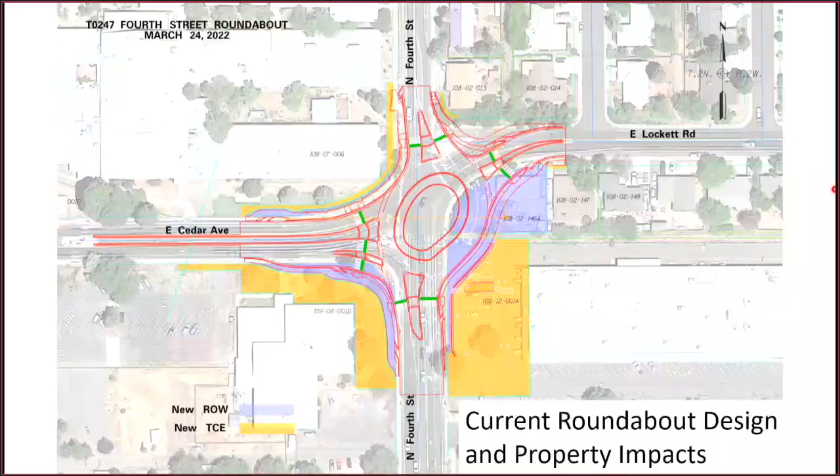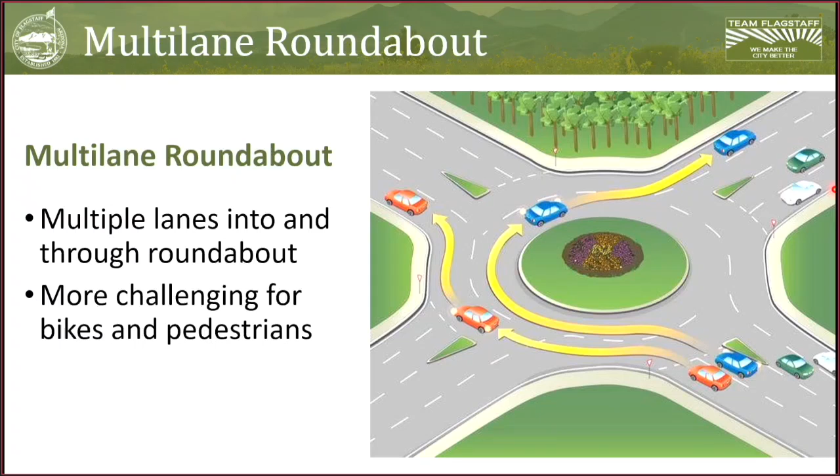I'm going to talk about several different terms that have been out there that people have been talking about. Multi-lane roundabouts are multiple lanes into and through the roundabout. This is a much more challenging situation for bikes and pedestrians, since there are multiple lane crossings that people have to cross. This is really only preferred in situations where we're on an arterial with high traffic volumes.

Turbo roundabouts are another term you may have heard. This is an alternative to a multi-lane roundabout that incorporates spiraling lanes. You have to select the lane you want to use before entering the roundabout, based on where you want to exit. Once inside, curbs or other features discourage lane changes, so you just follow your path until you reach your exit. This restricts lane changing while in the roundabout and is primarily done to increase efficiency for vehicles.

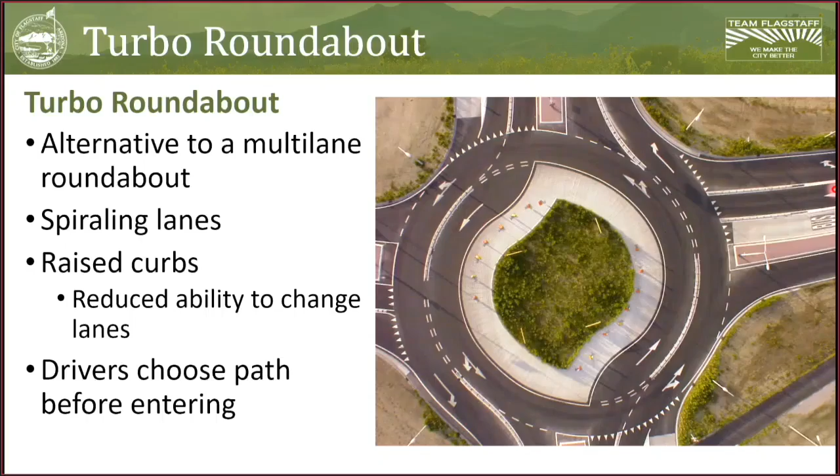The Dutch Bicycle Priority Roundabout, or Dutch Roundabout. The red circle around the outside is a separated circular bikeway. The primary consideration is that bikes and pedestrians have the right of way, so vehicles must yield to any bikes and pedestrians within that bikeway. These have been installed throughout Europe in multiple locations, and some data suggests there's actually an increase in crashes related to this design compared to a more conventional roundabout.

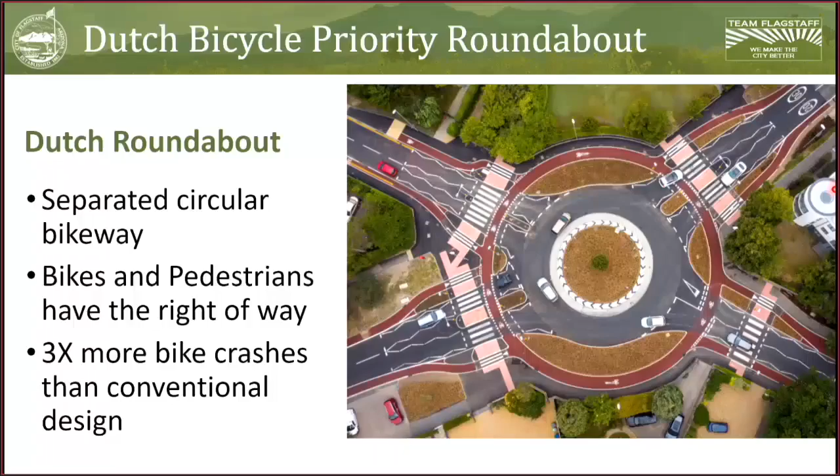Traffic circles aren't roundabouts, they're larger. This one is located in New York City, one of the most famous traffic circles of all time. These can have actual stop signs or traffic signals within the circle, and they're relatively large with relatively high speeds.

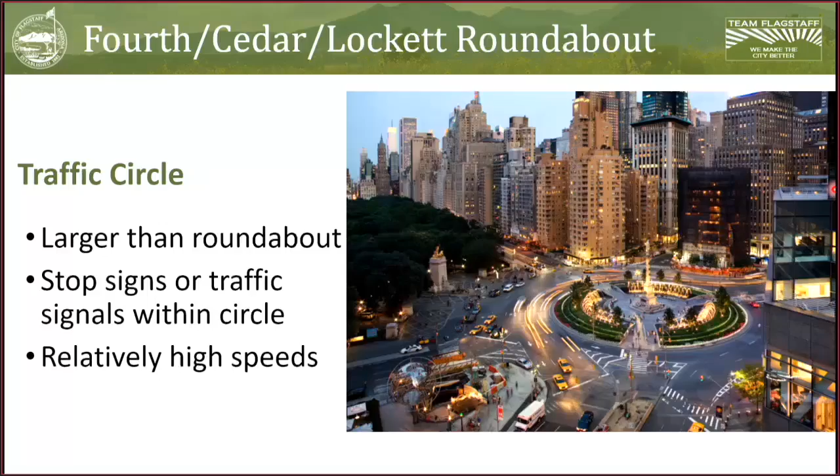Protected intersections - a word we've all heard recently. This is a signalized intersection that offers separated and protected facilities for bikes and pedestrians, allowing priority crossings so they can start or complete movements before vehicles move forward. It's an improvement on the traditional signalized intersection, but unfortunately it doesn't offer meaningful safety improvements for car versus car crashes - it's still a cross intersection subject to T-bone or 90-degree crashes.

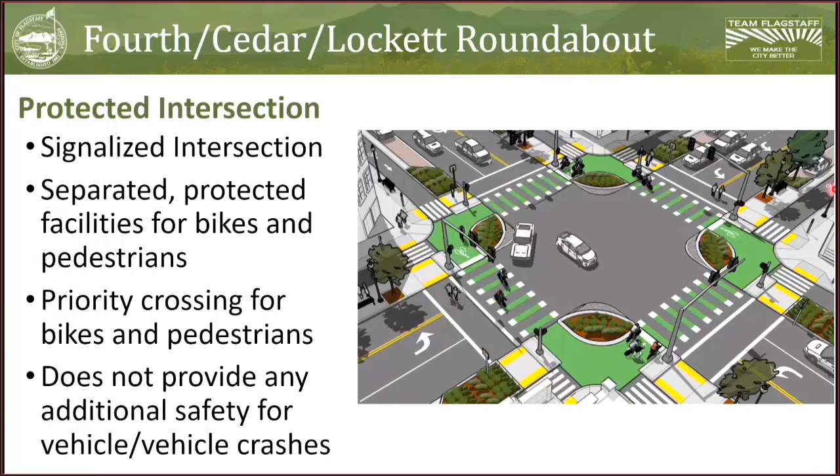Now we have a short video about protected intersections, from San Luis Obispo.

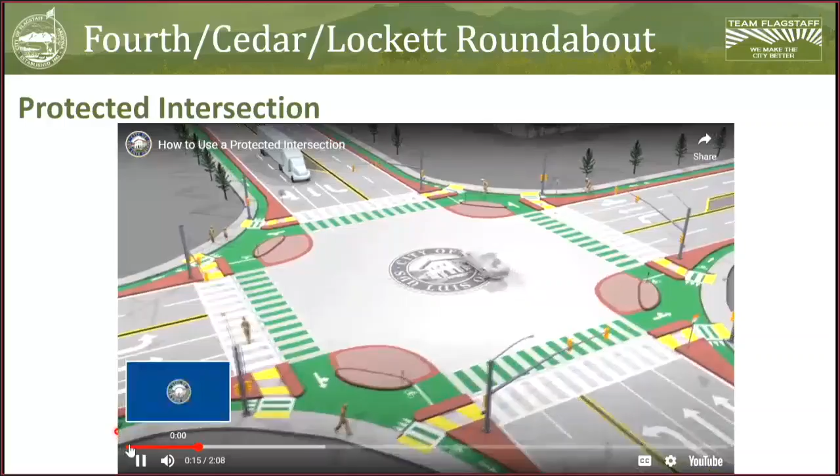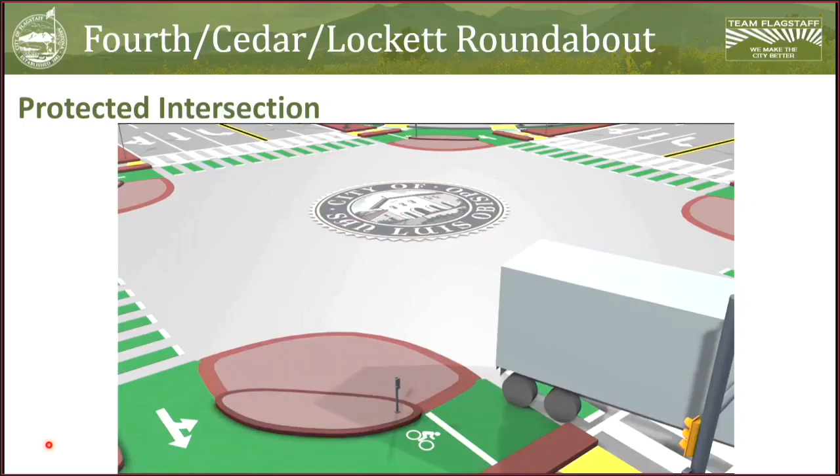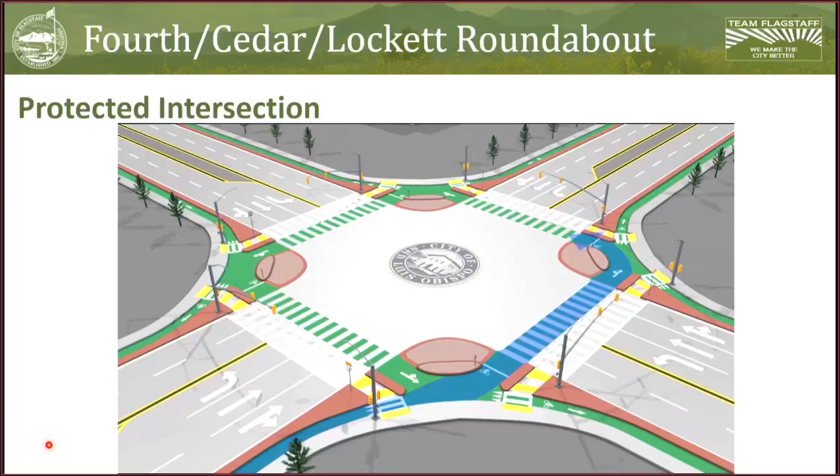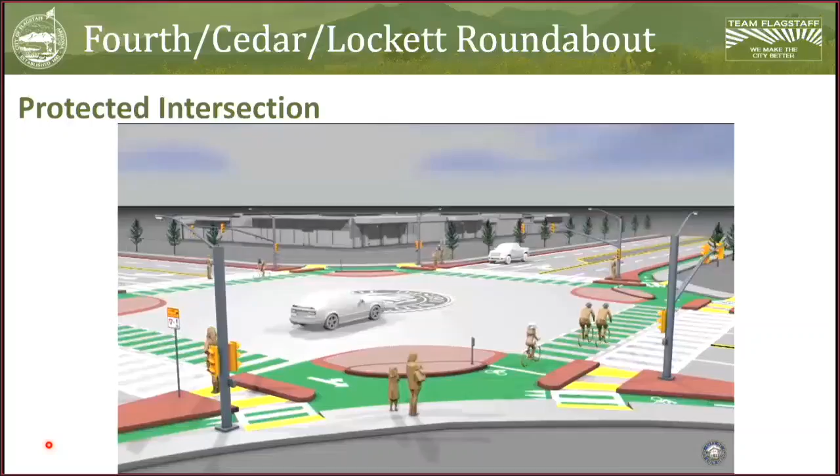Similar to a traditional intersection, except that it provides more separation and visibility between the different modes of travel, since being in a car, on a bike, on foot, or in a wheelchair each have their own unique needs. This is achieved through corner islands, which help slow down automobile traffic at right turns where it's particularly critical for safety. Corner islands also make those on a bike or on foot more visible and decrease the crossing distance for pedestrians and wheelchair users. For drivers, a protected intersection is very similar to a typical intersection: look for people on bikes in the bike lane on your right, and expect to see them stop further up where they're better seen. When making a right turn, avoid the corner island curbs, including mountable truck aprons that help larger vehicles navigate a wider turn radius. Also look out for pedestrians and yield to them in the crosswalk as usual. Some cyclists don't feel safe merging into traffic to make a left turn, so a protected intersection makes that easier: you can turn left by using the perimeter of the intersection, riding counterclockwise unless markings indicate otherwise. Approach the intersection staying in the bike lane until you reach the corner island; when the light is green and safe, ride to the corner island on the other side, turn your bike left, wait at the limit line for a green light in the new direction, then proceed through the intersection when it's safe. Be safe out there, and look for more protected intersections to come.

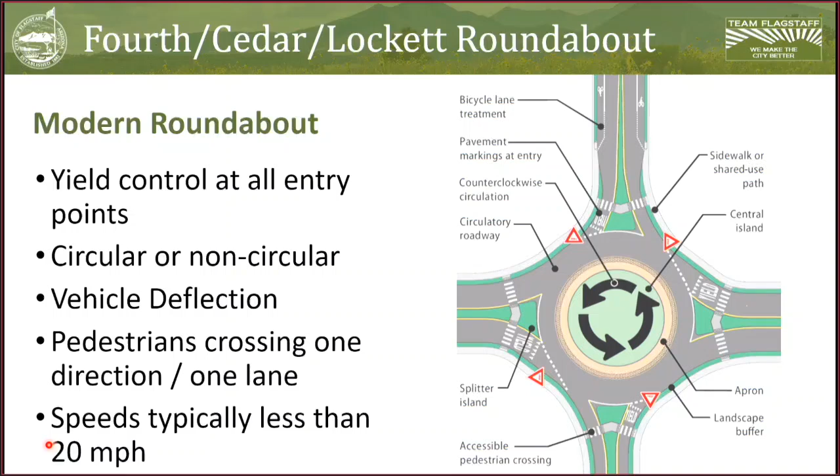And finally, that brings us to the modern roundabout, which is the roundabout we're currently talking about with this project. It offers yield control at all entry points, so anyone entering has to yield to drivers already in the roundabout. It could be circular or non-circular, although circular is more common. It relies on vehicle deflection, geometry that changes how people drive to slow them down and improve sight lines so you can see other vehicles and pedestrians. Pedestrians only have to cross one direction and one lane at a time. That vehicle deflection allows for much lower speeds, typically 15 to 20 miles an hour driving through a roundabout designed appropriately.

Then we have another video from San Luis Obispo on roundabouts.

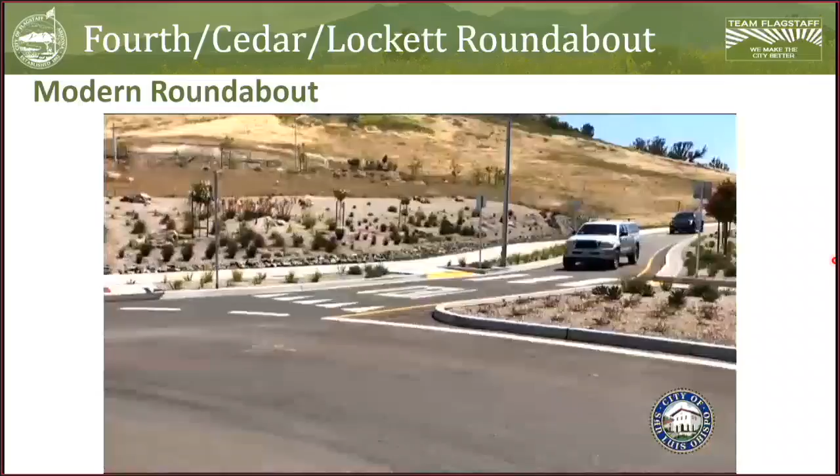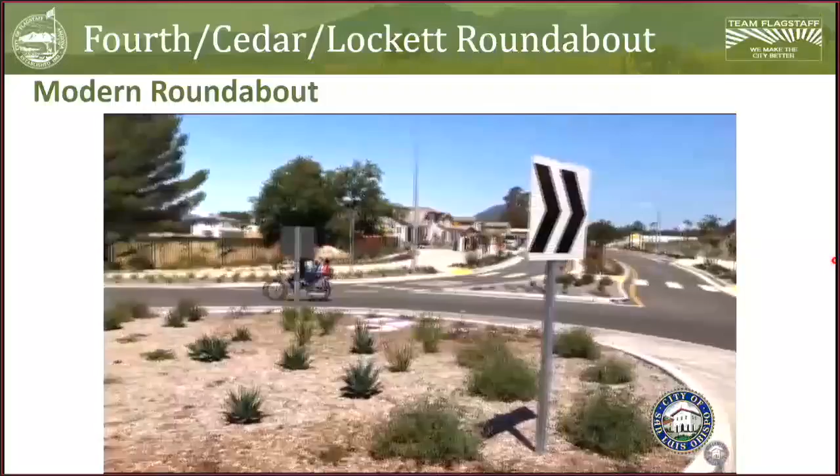Hi, I'm Luke Schwartz with the City of SLO Public Works Department, and I'm here to tell you a little more about roundabouts. You may not know this, but roundabouts are the city's preferred form of intersection control. They help traffic flow more efficiently with fewer stops and less greenhouse gas emissions compared to a traffic signal or an all-way stop. They're also great for pedestrian and bicyclist safety, slowing speeds and reducing conflict points at crossings, and reducing the potential for severe collisions that lead to injuries or fatalities. Roundabouts are one way our transportation department supports the city's climate action goals and Vision Zero policies through smarter transportation planning. To learn more, click the link below this post.

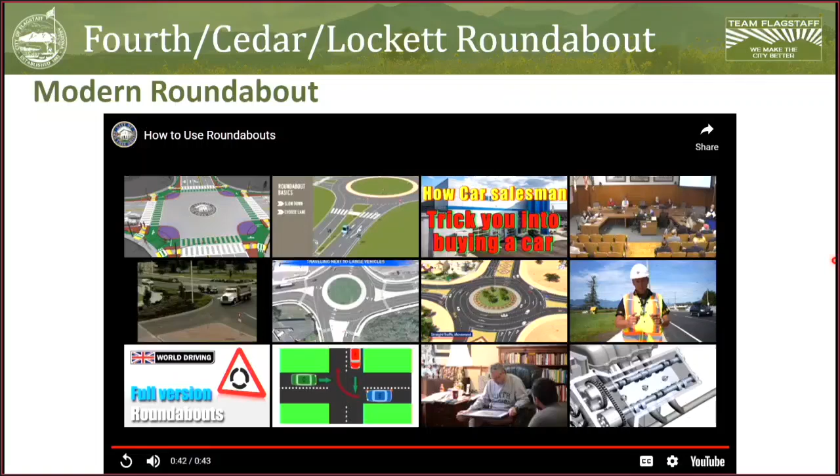Hi, I'm Luke Schwartz. Okay, apparently we needed to see it twice.

Again, a modern roundabout should be considered anywhere there's a traffic signal or stop control. Many communities, including San Luis Obispo, are moving towards a roundabouts-first policy, where a roundabout would be the preferred option for every intersection, at least as a first resort, before moving down the list. For schools, its primary function is to reduce vehicle speeds, which is critical for safety. We can reduce conflicts, but we cannot eliminate them, so we also have to reduce speeds, since that's the critical factor in any crash.

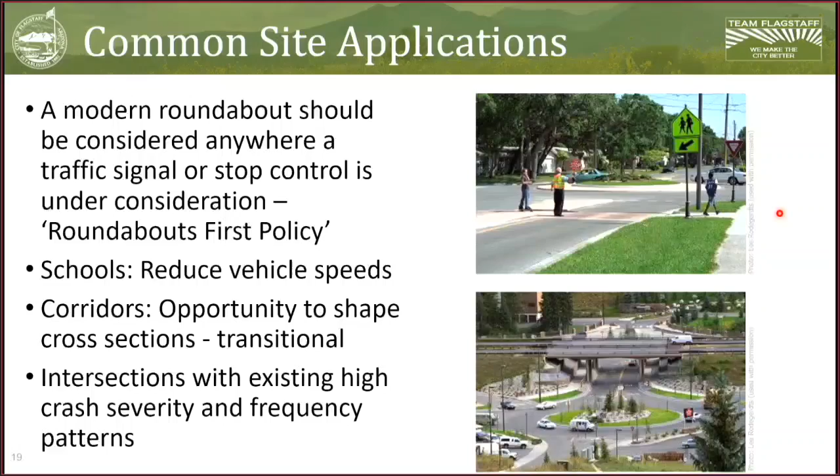Within corridors, this is an opportunity to shape the cross sections, and we can beautify those center islands. For this particular project, we have beautification coordinated, with plans to come in after construction is complete to beautify the roundabout's center island. There's an opportunity along the retaining wall, along the MEMS frontage, to beautify this and make it a true gem for our city. And of course, this is used at intersections with existing high crash severity and frequency patterns, which is what ultimately qualified this project for the grant.

I won't bore you with all of this again, but there are significant safety benefits through reduced crashes, both total crashes and vehicle crashes, for pedestrians, and for all modes of traffic.

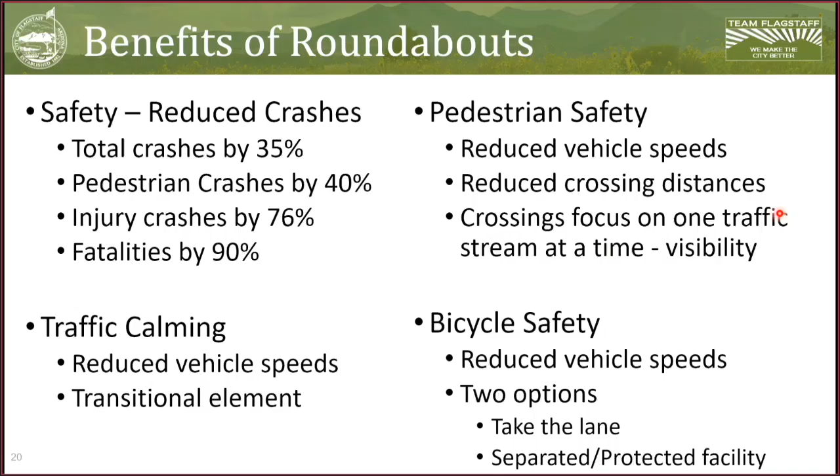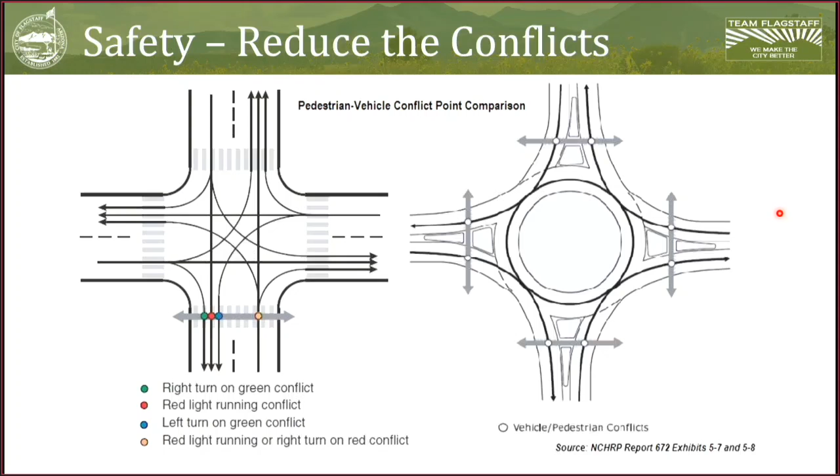This is accomplished through multiple things. As mentioned, one is speed, and another is simply reducing conflicts. In a typical signalized intersection, we have 16 to 24 pedestrian-to-vehicle conflicts, as shown on the left side. A roundabout reduces that to only 8 conflict points. Similarly with vehicles, conflict points go from as many as 32 down to 8 with a roundabout.

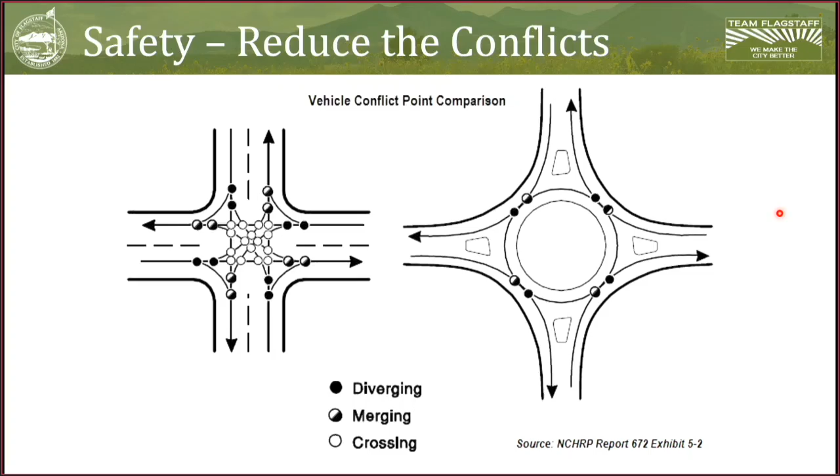To remind everyone, this is the...